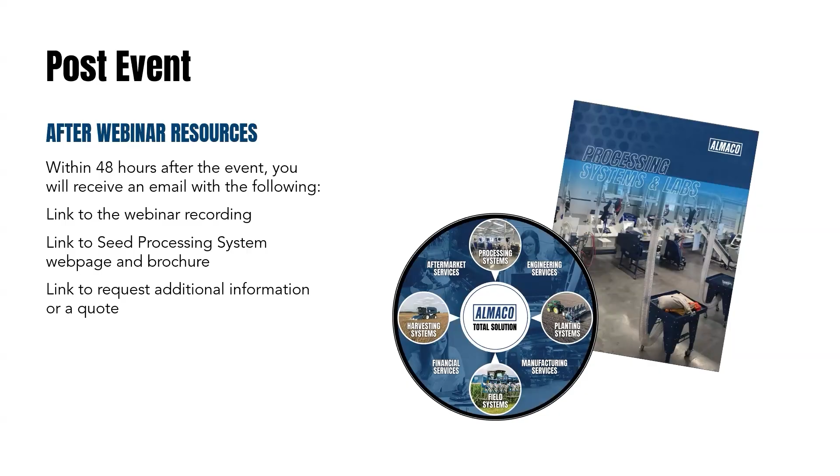We'd also like you to know that while this presentation is about seed processing systems, Almaco is a total solutions company for seed research clients. We provide solutions for seed processing systems, planting systems, field systems, and harvesting systems, as well as aftermarket services, engineering services, manufacturing services, and financial services to our clients.

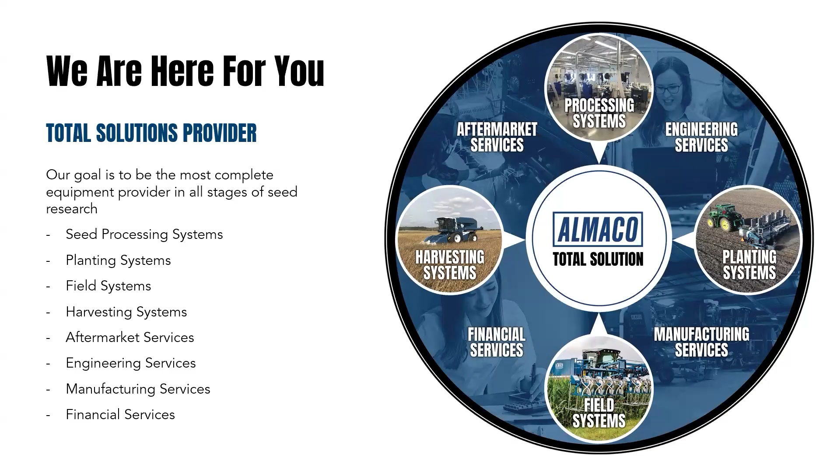It's a line of equipment that we put together that will help streamline your processes, whether it be for threshing or shelling, and then cleaning, grading, sorting by color, seed treating, and then packaging.

It's something we've been doing for a number of years, at least the last 20 or more. Really the goal is to make sure you have faster, accurate results, and your seed is 100% cleaned, sorted, treated, and ready to plant or package.

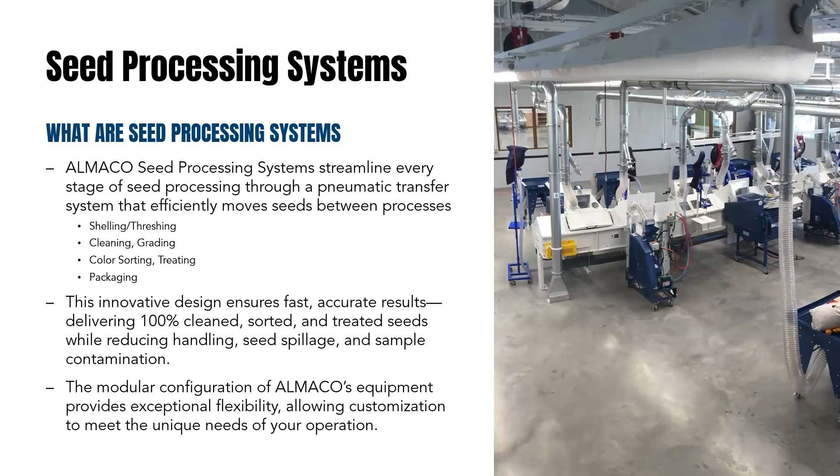The goal is to reduce the amount of times you handle the seed and contamination. All of our equipment, or I should say most of it, is modular in the fact that you can use it as standalone units, or incorporate it into a processing line, which allows a fair amount of customization to meet each customer's needs.

So why would you want to do this? Really what it comes down to is it's going to add value to your operation. What we try to do is make as much of it as autonomous as possible, removing unnecessary labor, where you're feeding each piece of equipment by hand.

You can reduce your workforce. Not that you want to get rid of people, but it's a labor and time savings measure. It also reduces some of your initial overhead costs. And it reduces the risk of human error in the data management and processing of your seed, with how the line is laid out with barcode scanners and labels and things of that nature.

You can speed up your processing time when it comes to your seed samples, where you have a multi-step process and turn it into one continuous flow. In the end, it compiles all of your data into one source, to where everybody within the company has access to it. And we can also scale it up to specific needs.

Sometimes people start with just a standalone piece of equipment, maybe one or two pieces. And because you can integrate them into a line, you can always scale that up as budget and time allows.

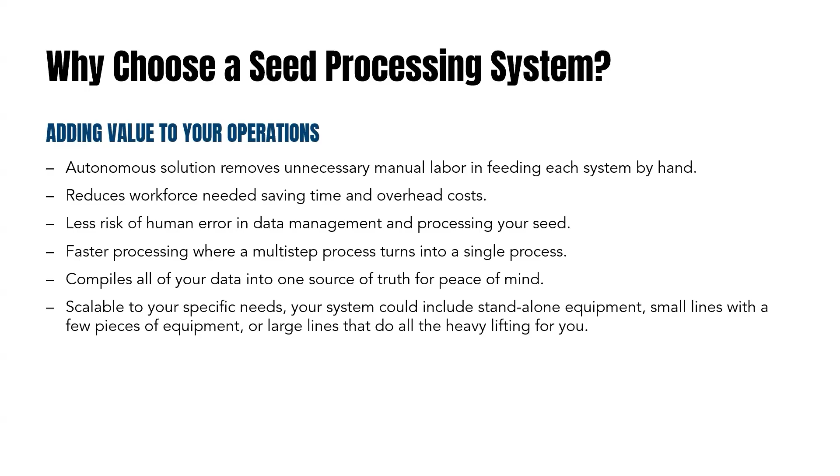Okay, next we'll be talking about the specific components of the seed processing line. Chris, can you tell us a little bit about each of these? As we walk through this, I'll try to give a good overview of what it is and what it's for, but there's so much we got to get through in a short amount of time.

To start with is a downdraft table, and there are a couple different sizes of this particular unit. At the beginning of your process, you would put your bags of ear corn on it, or bags of threshed material, or even still plant material. It's basically pulling any dust particles out as you're starting your process.

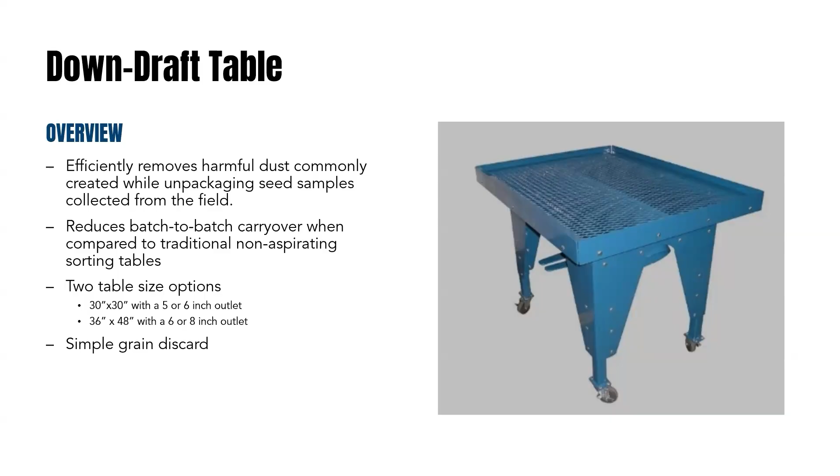As we get into the threshers and shellers, we'll cover most of them, kind of give you a general idea of what each one is for. Most of our equipment is going to be multi-crop setup, but there are certain things that are crop specific.

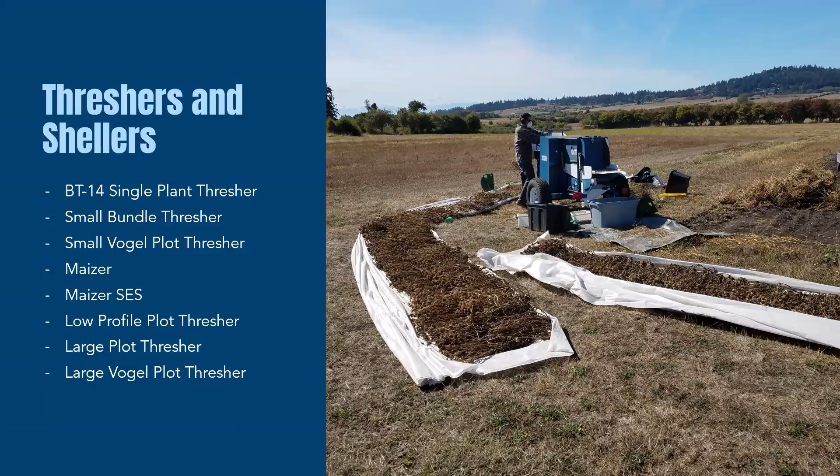On the threshers, we start with the smaller units where you have a belt thresher or a BT14 single plant thresher. That one is going to be a multi-crop machine minus corn, and is really good in podded plants or grain heads—think soybeans or edible beans or wheat. Several configurations of that particular machine can be used.

The small bundle thresher is something where you're going to be able to put smaller sheaves of material through it. Again, it is a true multi-crop machine minus corn, and the crops you're threshing will dictate basically what threshing cylinder and concave you use. Multiple cylinder and concave setups can be provided.

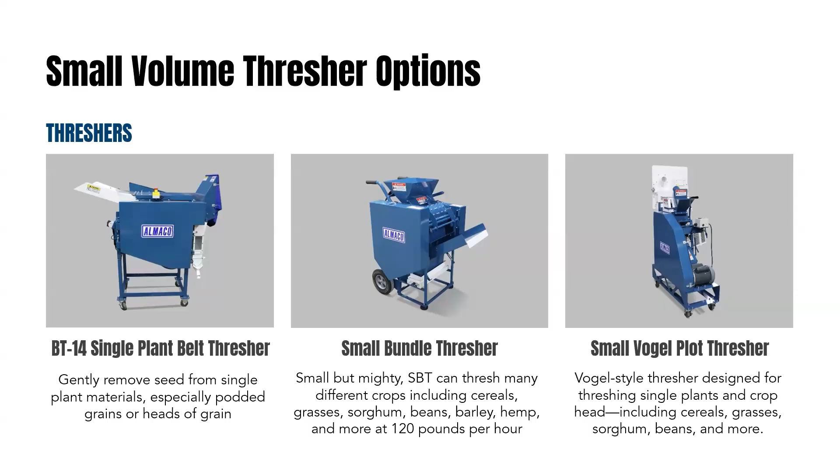The small Vogel plot thresher is really designed for a single plant, unless you're maybe doing some wheat heads or rice, where you can do maybe 4 or 5 at a time. Again, it's going to be set up similar to a small bundle thresher, where there's multiple threshing cylinder configurations available, and depending on the crop, it's going to dictate what cylinder we need.

So we jump up into the larger threshers, the low profile plot thresher. That one is a towable unit that will work in all crops, including corn. Basically, to use it in multiple crops you just have one single sieve that you would change out. There are some other options like air delivery, air compressor, and belt feeding. I would say that's probably the most versatile thresher out of the large towables, because it can do every single crop.

Next, you jump into the large plot thresher, and this one is a top-fed unit versus the LPT or low profile, which is more like a standard combine with an underslung concave. The large plot thresher is used in several types of crops minus the corn. We see a lot of soybeans, edible beans, wheat, and the threshing cylinder is interchangeable as well, similar to the small bundle and the small Vogel.

The large Vogel plot thresher is what's called the Vogel style capacity, or high capacity thresher, and this is used a lot in what I would say is cereal grains. It's designed to push a lot of material through, out in the field or in your facility, and it's been around since the late 50s, early 60s when that design came out. So that's one that's going to be used a lot in small grains or cereal grains.

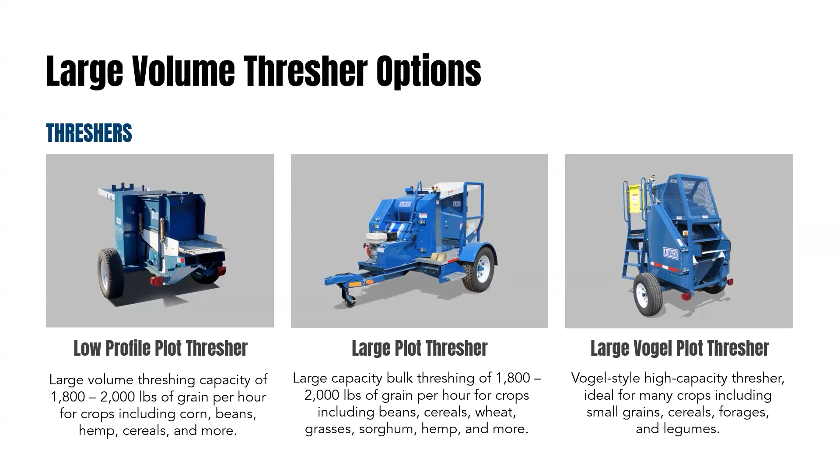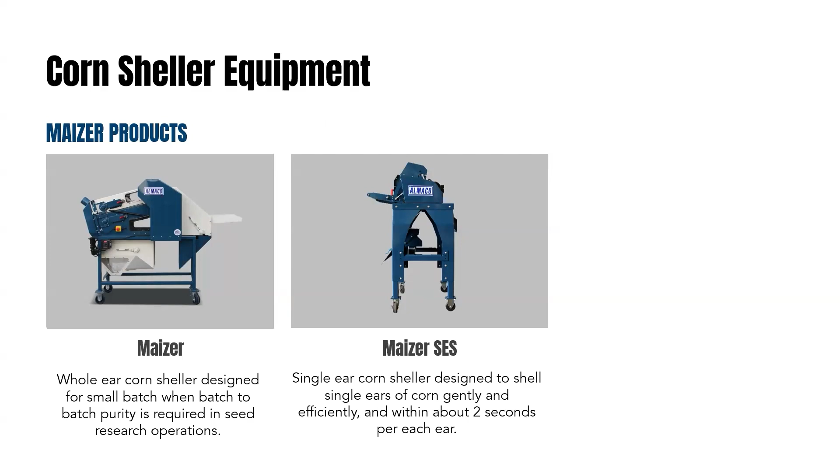And then finally, we come down here to the Air Blast Seed Cleaner. This is just a little benchtop model that we use to do some final cleaning of your sample once it's been run through a thresher and through the winnowing air on that machine.

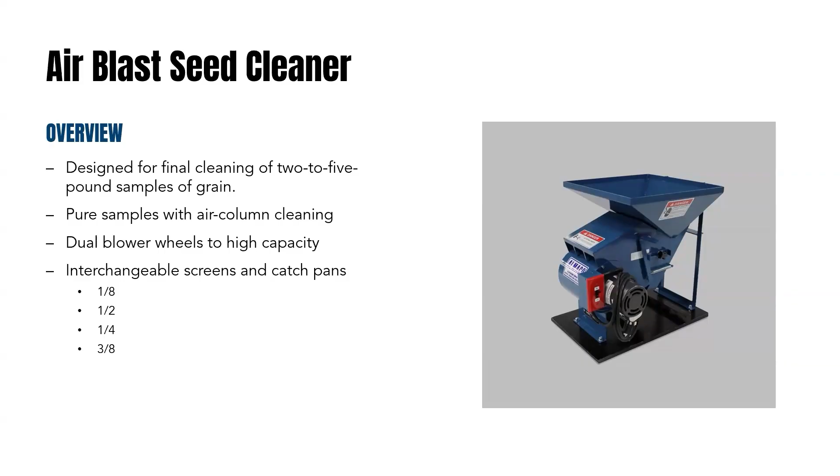It's pretty compact, and you have 4 different interchangeable screens available, and the screen size is going to be determined by what crops you're going to clean with it.

So the portable seed lab, well, what this is if you don't have the budget or the need for a combine, you still need to take data collection. You can pair this portable seed lab with any of our threshers. Once the material is threshed and you pour your seed into it, it has the D1 data collection, a mobile demand handheld. It runs off the harvest software, and it'll take your weight, moisture, and test weight, and then save it back to the file. So a little easier way than using a handheld GAC or something.

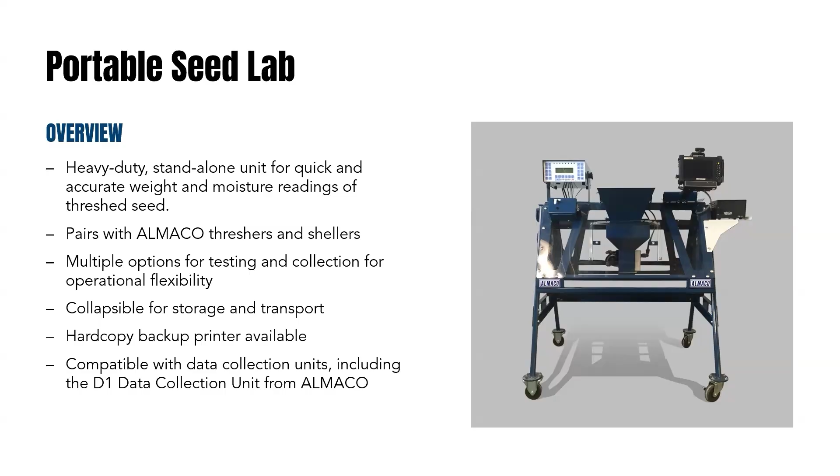So I mentioned the D1 data collection unit. This is the replacement for the Seed Spector LRX, and this particular unit is pretty much a direct, 1-to-1 replacement for it. There's a little bit of difference where you have an app on the tablet now instead of having a screen. You don't have to worry about internal batteries, so you don't lose your moisture and weight curves because your battery goes dead. It's weather tight, it's durable. You can mount it anywhere on the combine or on a portable seed lab. You don't have to remove it at the end of the day. Once it's mounted, you don't have to worry about moisture or dirt and dust in it. It will take a reading no matter what crops you're working with. It's all based off of the weigh system and what data it's sending back.

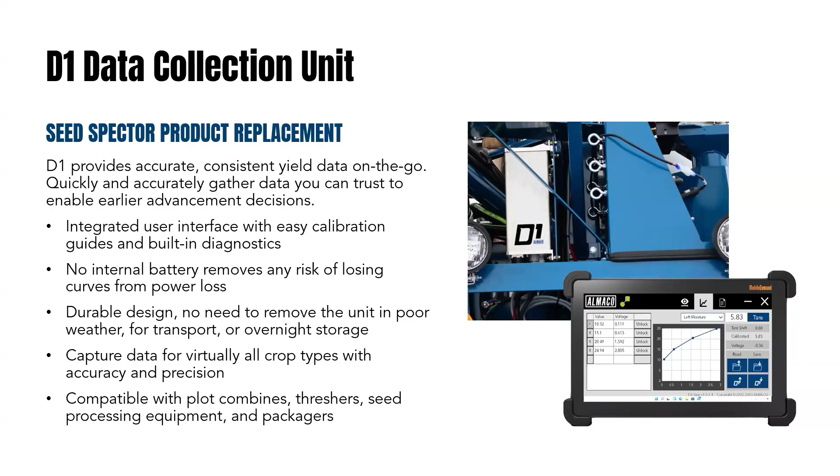You can use it on plot combines, you can use it on a portable seed lab. It's compatible with machines with packagers and seed processing equipment.

Okay, so we're going to get into some of the seed processing portions or items now.

So we have what we call the conveyor systems, and there's a couple different types that we use. On a main conveyor, it's fully enclosed, and your threshers or shellers would mate up to it, and there'd be dust collection hooked to it. You'll see as we get further into the slide some examples, but basically it's a way for all of the waste that comes out of the thresher to be removed out of the building without having to manually touch it.

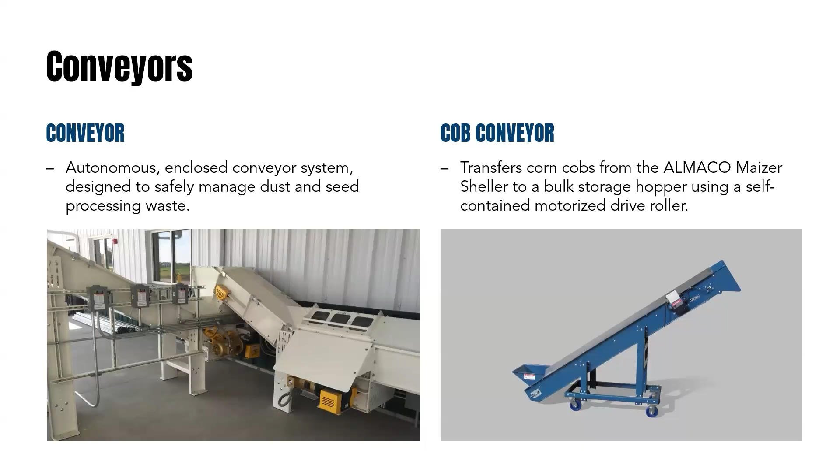The cob conveyor works in conjunction with the Maizer, and that is going to basically take the cobs after the ears are threshed and put them into some sort of storage, whether it's a dumpster or a garbage can or something of that nature. In past lines we've even put them through a wall where the dumpster's not even in the same room as it.

So aspirating, one of the things that when you're talking about seed cleaning and processing, you want the cleanest sample possible before it gets to the next stage. When we transfer seed to the Seedboss, we like to have it run through an aspiration system. Once it cycles, the corn or bean seed goes through an aspirator. There's dust collection hooked up to it, so it'll take in fine little bees wings or light material, and if there's any seed that may be really light, it could pull them out, but then they get sent through down to a discard chute and saved, so they're not lost.

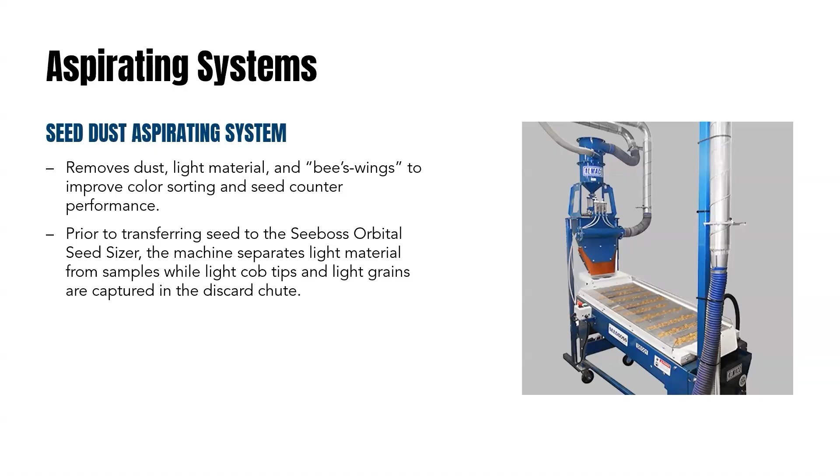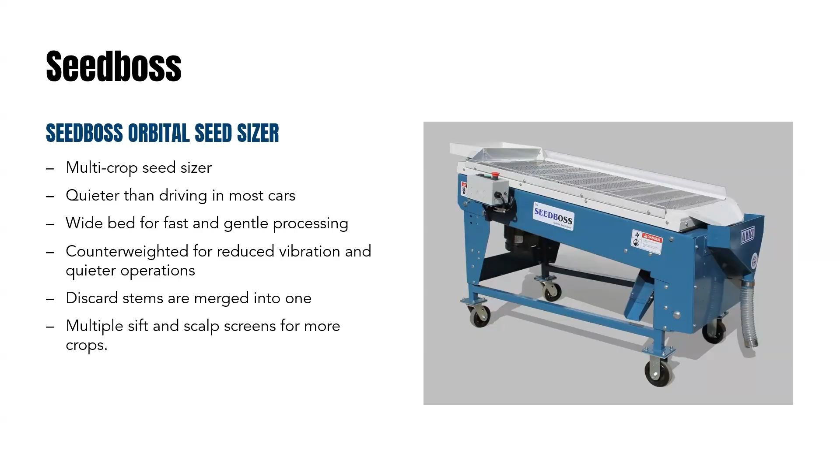So this is our Seedboss, it's an orbital seed sizer. You can use this machine to basically grade any type of seed out there. We have multiple screen configurations for sift and scalp. It's adjustable, so if you have smaller seeds, you can flatten it out so it doesn't run down, and you get a better grade on your seed, so to speak. It's very, very quiet operation. It really doesn't, it's running, but you just hear some of the internal things moving around inside of it.

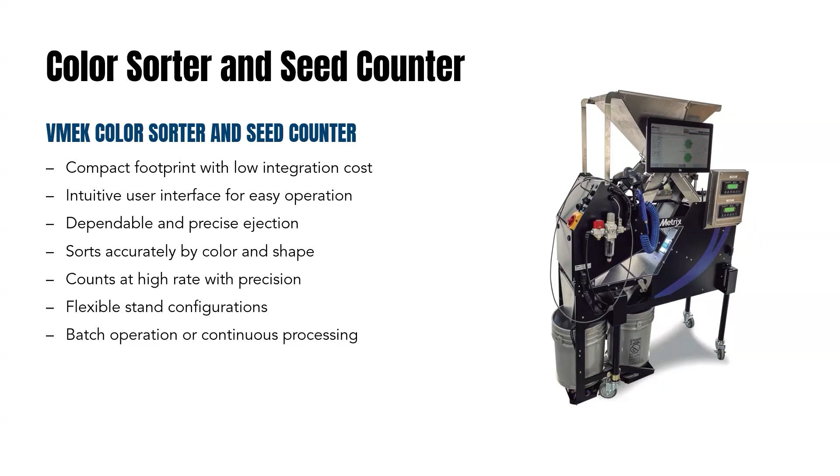So our color sorter and seed counter, we use what's called the Metrix, or the VMEK. This can be used as a standalone or integrated into a full processing line. It has a very easy interface to work with. It's very fast, it has a high rate of count and sort, and you can do it in a batch. Normally in a seed processing line, it would be a batch of so many pounds of seed at one time, or it could be continuous flow if you were doing large bulk samples.

We have several types of treaters available that can treat anything from as few as 50 kernels up to 20 to 25 pounds, or even 50 pounds of seed, depending on which one.

The most common one we'd use in a processing line would be the R12 on the roller stand, up in the top left of the picture. The one below it is what we call the R6, more of a benchtop model for very small quantities, maybe 5 to 20 seeds depending on the seed itself. And if you're in a larger continuous setup, we'd use the R25, which treats up to 50 pounds of seed at a time.

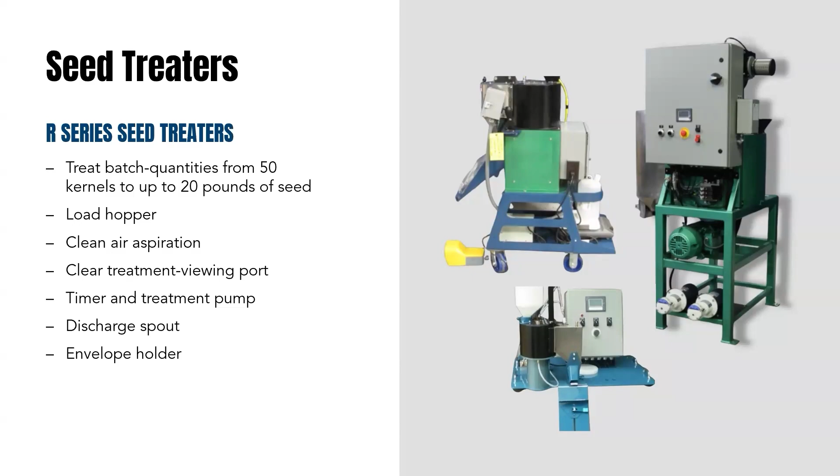So to make all this work, you basically have to have transfer systems, meaning we're transferring the seed from one step in the process to the next. In this example, we are shelling with a mazer, transferring the seed to a seed boss, and then the seed from the seed boss is transferred to the top of the stand above the VMEK, where the VMEK will do the counting and color sorting. From there, the good seed, the numbers you want treated, fall into the R12 seed treater.

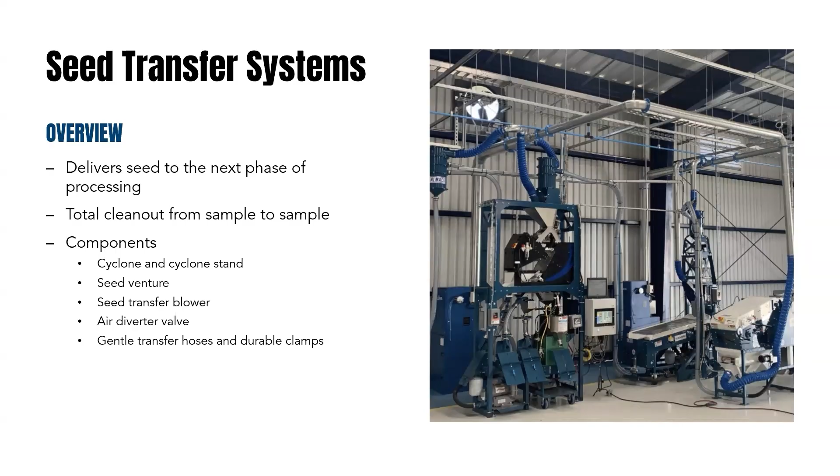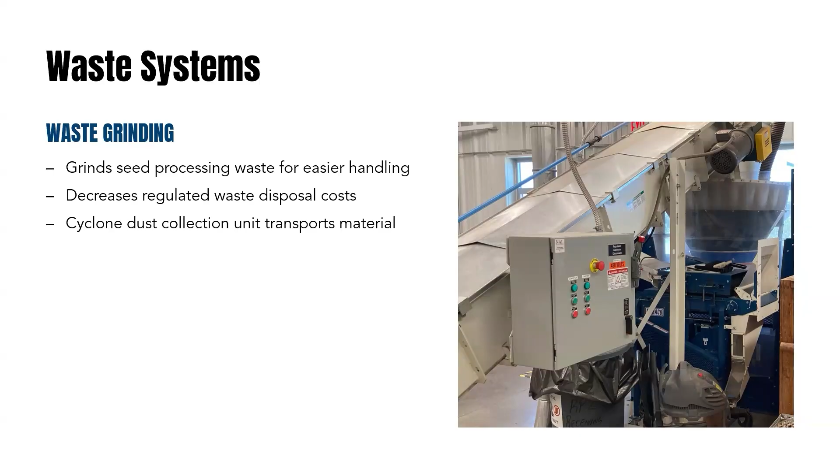We do have several lines out there that use what we call waste grinding. That's where any trash material that comes out of the back of the thresher goes onto a conveyor and is fed into a grinder. It basically decreases the regulated waste disposal cost because you're turning it into very fine material, and it also has a separate dust collection section for that particular unit.

So part of this that we have to do on the seed processing lines is you basically have a brain that runs it, and that's what we call the control system. That control system is going to manage how and when things happen in the step or in the process. It's going to control the timing, how long the air is going to be open for the seed to flow to the next place, and it's going to control the timing of the treatment for the seed.

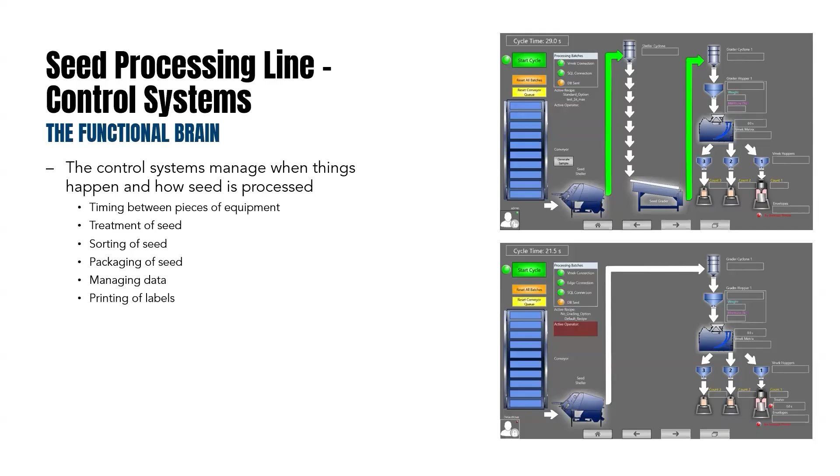Basically, how much you want packaged is going to be part of the recipe. And then it's also managing data, and in the end, it's going to print your label with the information you want on it. So part of the control system is the software and the labels.

To do that, our team will basically sit down and get an understanding of what you want to see. It could be tied into what you already have on your barcodes with an addition of something else, or another identifier. At the end of the process, when the cycle is complete, it's going to print your label out, and you're able to put it on that packet and then scan it at a later date to know what it is, or view the label and it'll tell you what it is.

Part of the processing line itself, there's a lot that goes on with it. So in the beginning, if you're thinking about putting in a full line or even a mini line, we would want to come out, visit your site, verify your layout, make sure there's enough room to do what you want to do, ceiling heights and things of that nature.

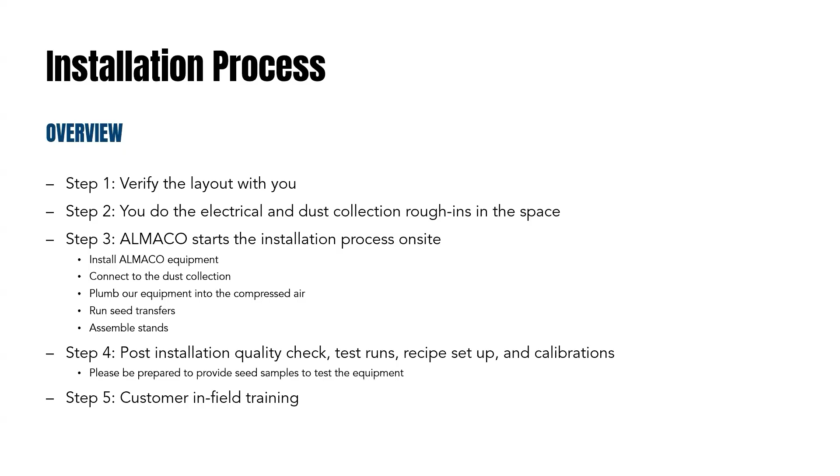Great, and now we'll transition into some examples. We saw the components individually and talked about what those entail, but how do they all come together to create a system of some kind to support our clients?

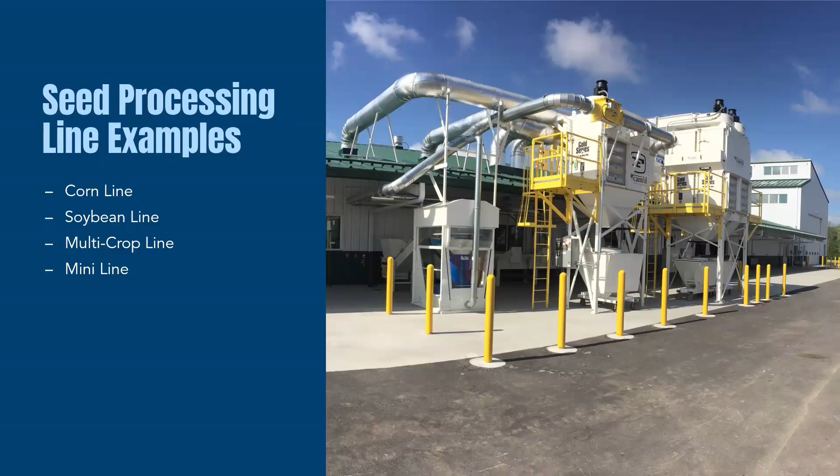We have the ability to create what we would call a complete corn line, a soybean line, a multi-crop line, or what we call a mini line. On a corn line, basically everything start to finish is laid out pretty much in the overview, where you're going to start with a downdraft table.

You're going to scan in your sample. We have an option for an in-feed table if you want to in-feed your material into the Maizer versus hand feeding it. Then the Maizer would shell your corn.

The clean corn, or your shelled sample, is going to get transferred, and the cob conveyor is going to take the cobs away into a trash receptacle or bin.

The corn is going to get transferred to the Seedboss, and at that point it's going to be graded, and your good seed will go to the stand for the Vmek, where it'll get sorted and counted.

At that point, there is an optional weigh hopper that we can put underneath it, so you can get a weight on the number of good seeds that come through.

And then once it's sorted, it's going to go to the seed treater. And then at that point, anything that's remnant or discard is going to be saved.

You have that option to kick so much remnant seed out, and then anything else that's discard will be saved. You have the opportunity to either throw it away or store it away for a later date.

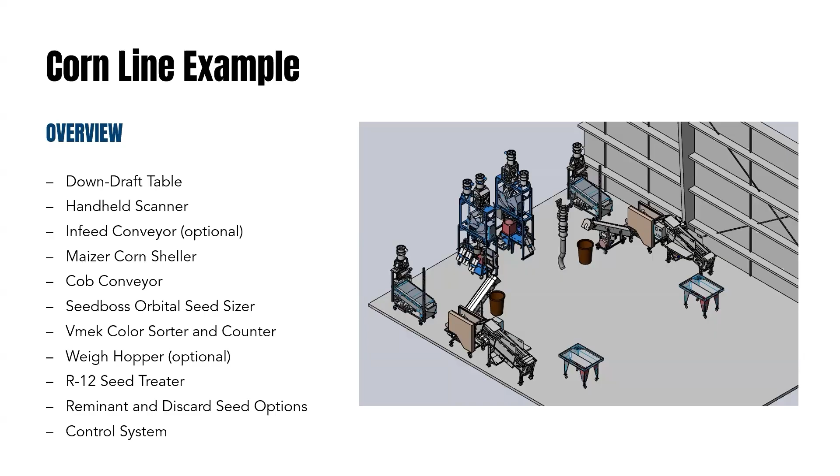And then when you have a full corn line, this is where the whole control system comes into play, for your print labels and to actually control the timings and everything in between.

We have options where you can start with a downdraft table. You have the scanners; you can scan it in, no different than what we do on a full corn line.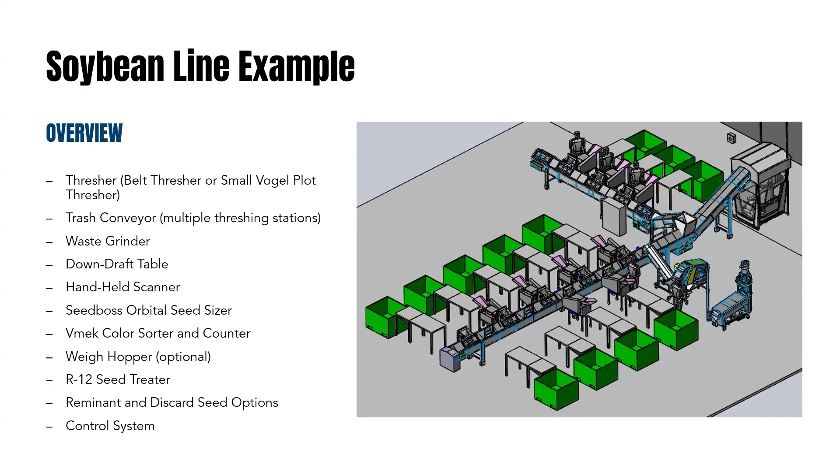Once the seed is threshed, then you can run it through the seed boss. It can be run through your Vmek color sorter counter. It could be treated, and we still have the same remnant and discard seed options in the control package.

So when we talk about a multi-crop line, what we're looking at is a conveyor system that will accept, say, the threshers, a belt thresher or a small Vogel plot thresher. And in this case, you see where it's set up for corn as well.

And the threshers themselves could be set up for different crops. So you could have one that's set up for soybeans, one that's set up for wheat, one that's set up for sorghum, all attached to the same conveyor.

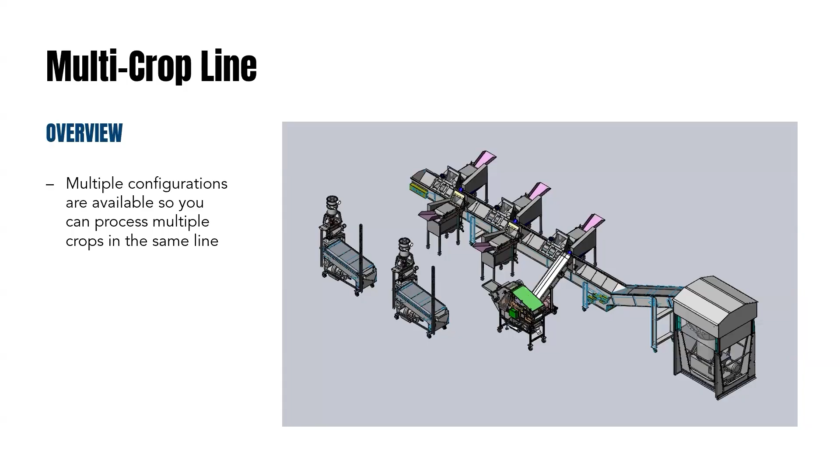And in this case, the seed bosses could be set up with certain screens, one set up for soybeans, one set up for corn, with additional screens that could be changed out for other crops.

And then on a mini line, what we call the mini line is something where maybe the customer is only going to start with, say, just a mazer and a seed boss, or a thresher and a seed boss. And we have special transfers that we can use to go from those two pieces of equipment.

It could be a full pneumatic transfer like what you see in the model, or we have some pneumatic air transfers that are manual with a push button or a foot switch, and you collect it right there at the machine.

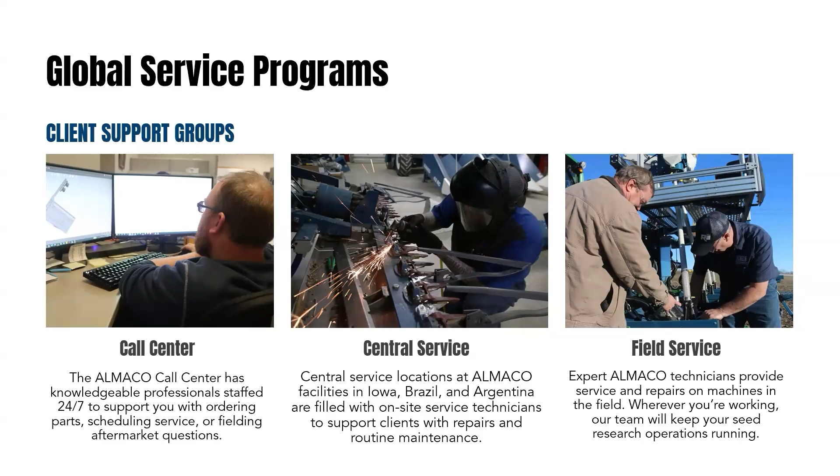Within our service department, we have 3 primary groups to better serve you: a call center, central service, and field service. Our call center is staffed with knowledgeable professionals on call 24/7 to support you with ordering parts, scheduling service, technical support, or aftermarket questions. Our central service locations, in Iowa, Brazil, and Argentina, support clients with repairs and routine maintenance, as well as equipment upgrades and customization, as I mentioned. Lastly, our field service technicians provide service support and repairs on site or in the field, so wherever you're working, our capable team can keep your equipment running.

As part of our pledge to keep your equipment up and running, we offer a Precision Plus preventive maintenance program. This is designed to help reduce overall cost of ownership by planning ahead at the beginning of the season, going over the equipment, doing inspections, and identifying things we feel could be potential hazards going forward that could create a downtime event, creating peace of mind.

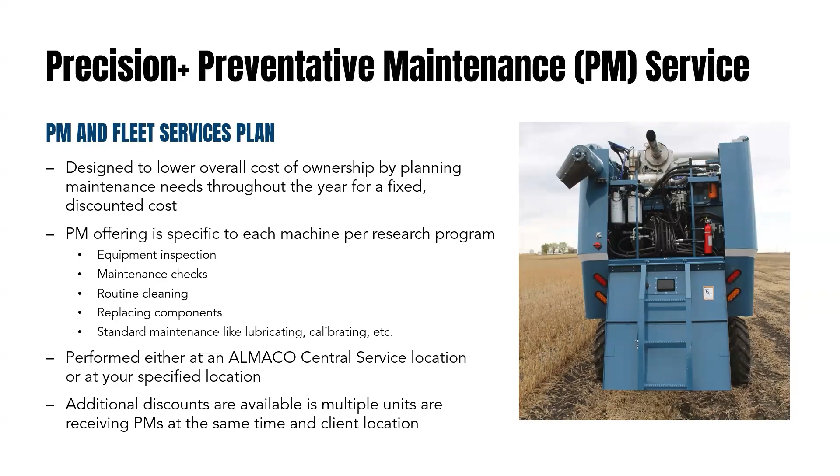We offer PM specific to each piece of equipment, which includes equipment inspection, maintenance checks, cleaning, replacing components, and standard maintenance like lubricating and calibrating. We can do these either on site or at one of our central service locations, whichever you prefer. Some things to note: we do offer discounts for these, so if you want us to come on site for multiple pieces of equipment, we can offer a type of discount on those.

So just some different pieces of equipment examples for our PM programs. Again, most people know it's harvesters, planters, threshers. We do offer seed processing line ones too, though I don't think people probably know that.

A lot of that is tailored more towards the type of equipment in your line. So if you have a thresher, there's a thresher PM. If you have a mazer, there's a mazer PM, and all that can be custom tailored to the line you have. In addition, there are other things such as automated packager systems that we do PM on, or things related to our planting systems, like what we consider a carousel or a verifier.

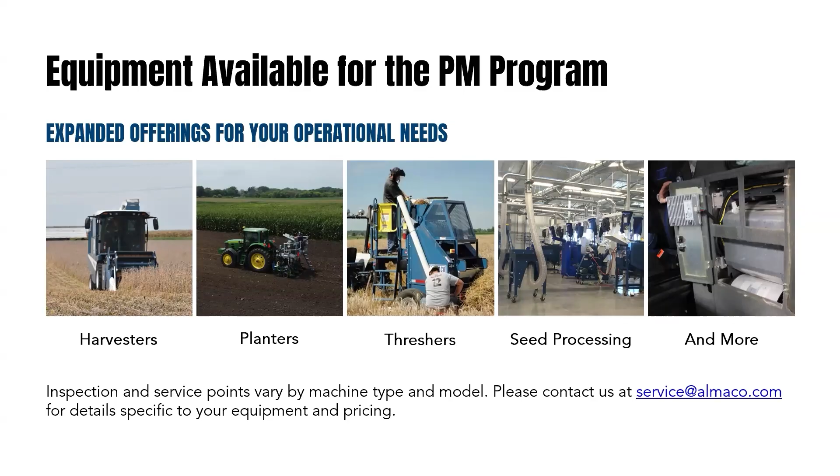Industry leading support - just some last little bit to talk about. We have the right parts right now. What does that mean? We pledge to have the right parts, meaning we pay close attention to what parts are needed seasonally to make sure we have adequate inventory of those items during peak seasons to reduce downtime and keep you running.

We also offer the best in class warranty for exceptional peace of mind on parts and repairs performed by Almaco. We want you to feel as confident in your equipment as we feel in providing it to you.

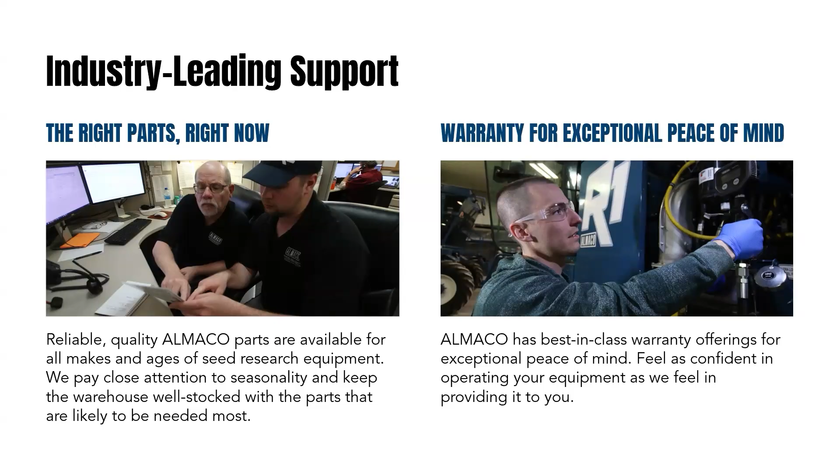Other items we offer as part of a service group are in-field orientation and application review. You commonly hear us refer to these as IFOs or ARs.

IFO, or in-field orientation, is typically when a piece of equipment is brand new and you purchase it from Almaco. So what we like to do, specific to a seed processing line, once it's set up and installed, we schedule this with the primary operators and the leads of the site along with our field service technicians. They will walk you through how to calibrate it, maintenance, explain the different types of equipment, and show you how to run it.

In the case of specific control systems, they'll show you how to create the different recipes and how to run and modify them. An AR is very similar to an IFO, but these are more for people that already own different pieces of equipment. So let's say it's a new year and you got some new operators and just need a refresher course - we can come on site and offer something like that.